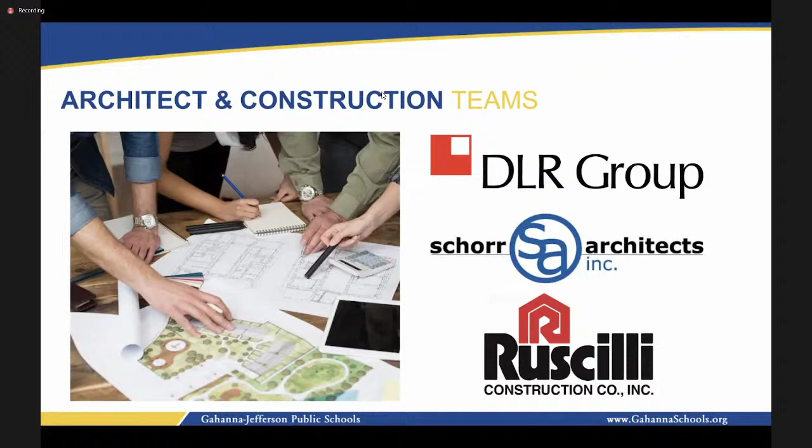I'm not going to name all of the people on our Master Facilities Committee, but this group has been outstanding, knowledgeable about construction and about schools. They represent so many different facets of what goes into a building project like this. I am so grateful for their leadership, their guidance, and their help in designing both Phase 1 and Phase 2 of our Master Facilities Plan.

I would be remiss if I didn't express our gratitude to our community for giving us permission to go ahead with this project. We have 5 construction projects besides building a new Gahanna-Lincoln High School. We're doing additions at Blacklick and High Point Elementary, and additions to all 3 of our middle schools, East, South, and West. We're doing this work because we're growing. There's lots of undeveloped land that's getting quickly developed in Jefferson Township, and we need to build in time for all the new families coming to our district.

We're growing every year, and much of this work, our Phase 1 and Phase 2, has been driven by an enrollment study, a demographic study we did on student growth, led by a firm out of Hilliard called Cooperative Strategies. They studied our enrollment, all our housing tracts, our apartments, and our developable land, and gave us a forecast of where we would be with our student population.

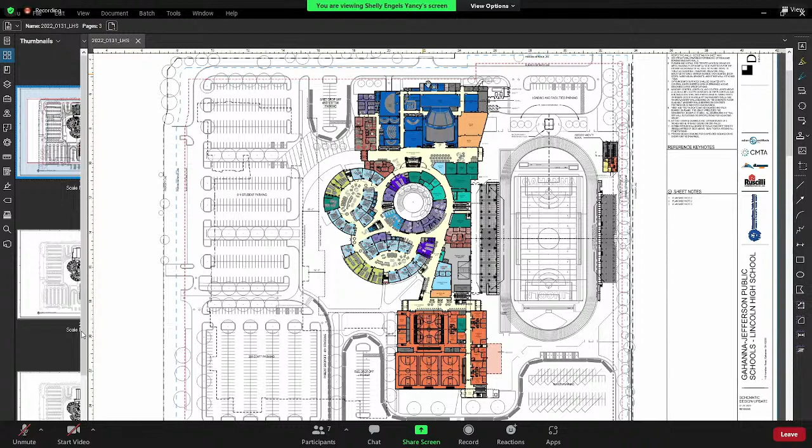Is the gym. So I'm going to zoom into the north. Here we have the main admin suite with a secure entry vestibule where you have to be buzzed in to enter the school.

This is the north side, so we have a north commons, which also helps with the lobby space for the performing arts. The admin has the principal and key people in this suite, as well as a workroom and lounge.

We have the Hamilton House, the special needs program here, and the Performing Arts Auditorium and Stage, which seats 1,200 people. We have the orchestra, band, choir, and black box with some of their ensemble and practice rooms, as well as some support spaces in the back for the stage.

The music tech classroom is also in the performing arts area, as well as scene shop and costume. You'll also notice a lot of gray boxes, and that is what helps support the building functions and keep the energy costs down.

You'll also start seeing the distributed dining that we have throughout the high school in these orange colors, and this is the main kitchen and servery.

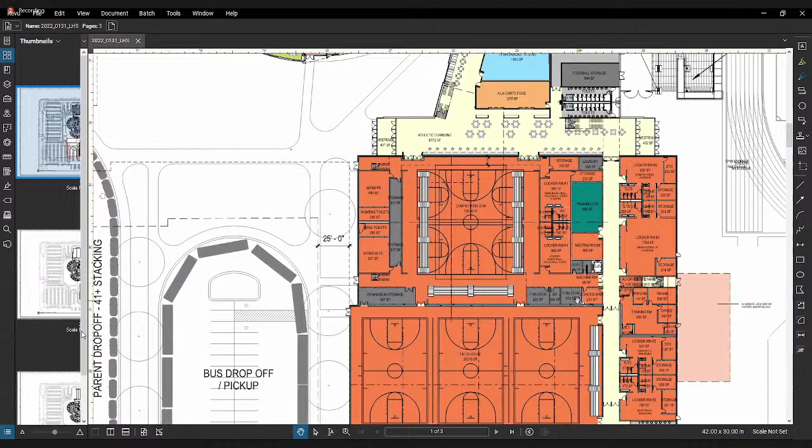And then we have the main competition gym that will seat 2,500. That has locker room support on both sides, as well as storage, and a direct connection to the field house. We also have a few CTE programs, as well as more support locker rooms and meeting rooms.

As I move up to the second floor, you can see these open to below because we'll have the double height spaces for the gyms. And then there's wrestling and weight room and coaches suites with some special ed future fit programs.

As I move back to the north, you'll see this is the Commons connection to the below for the South Commons. And then this center portion here, where the Prides and the CTE and the visual arts are, that's a 3-story building. And here you'll see again the similar Prides.

And then we have again the special needs, the media, and some classrooms for future growth. Up here is the arts area for the 2D and computer arts. And then you'll also see the stacking of the admin and counseling.

So I go up to the third floor. Again you start to see that here are the 2 Prides, the connections with CTE, the counseling, the admin, special needs, and some more CTE classrooms down here.

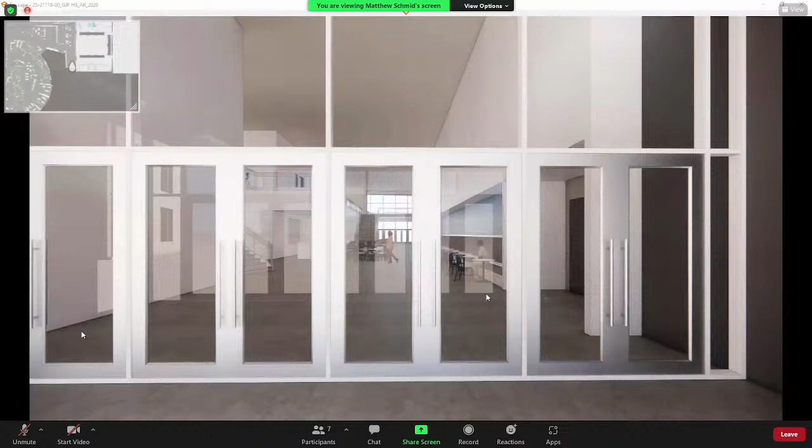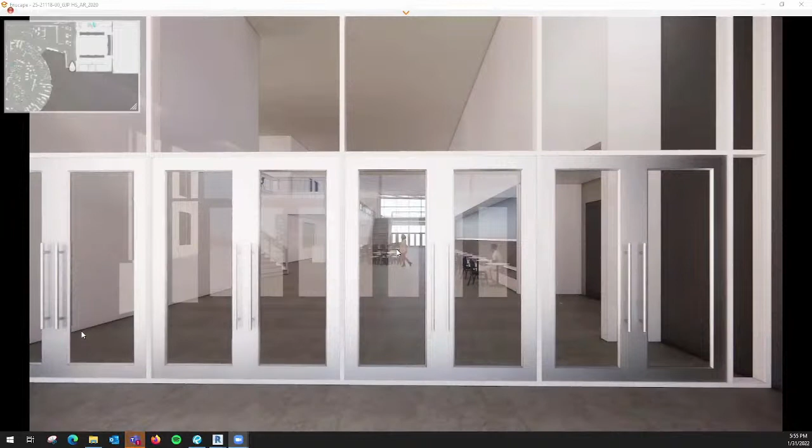Before I get started, I want to orient everyone to where we are within our 3D model. You'll see in the upper left corner a mini map of what Shelley just showed from our walkthrough of the plan. The intent of this 3D walkthrough is more to show the spatial qualities of the areas. There are a lot of white walls, and a lot of pieces of furniture and materials that have not been selected yet, so just wanted to give that as a caveat before we started.

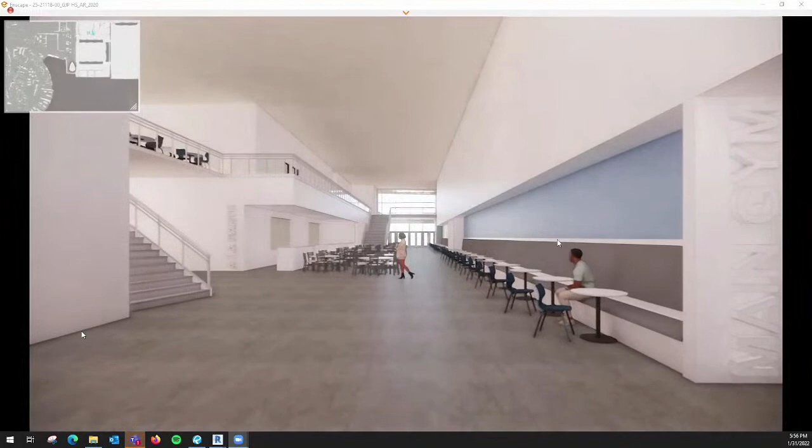We are entering into the west entrance to the athletic areas as part of the walkthrough. As we go through the doors, you'll see the main gym doors, as well as additional seating for the South Commons servery area, where Shelley noted an a la carte space. Right in front of you is a connection to the second floor.

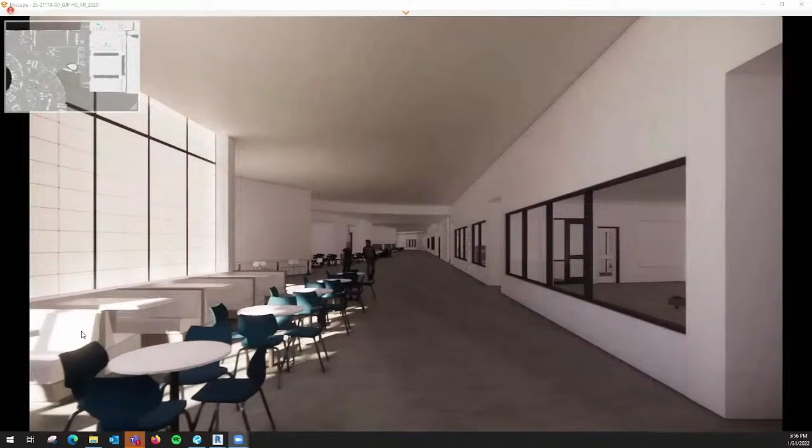Right now we are going up the main north-south passage of the school. On the right side you'll see classrooms, a TV broadcasting area with students recording podcasts, as well as additional classroom space. As Jill noted, the hallways within the building are about twice as large within the main circulation areas as the existing building, which is what you're seeing currently.

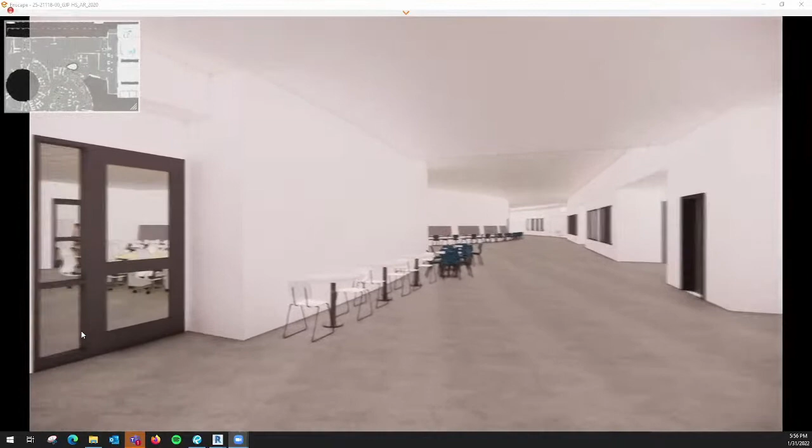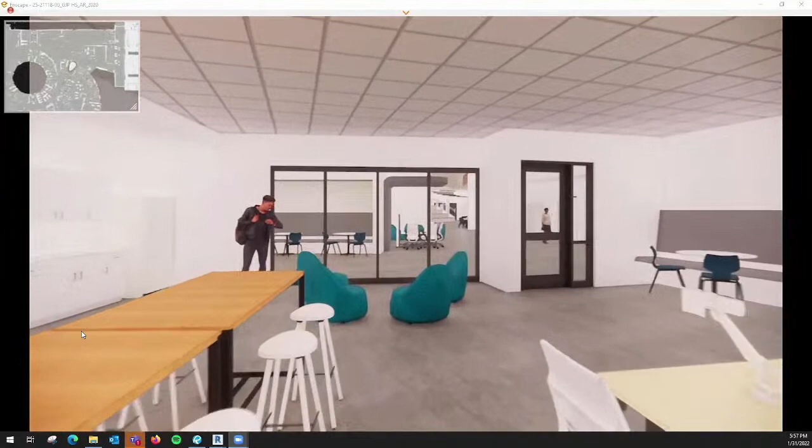We're going to take a left here into a teacher lab, which are located at the entrances to each of the academic prides located on each floor. On the left side of the teacher lab you'll see some smaller rooms for individual touchdown and phone calls, as well as some benching stations throughout the teaching labs. These function similar to the way your current departments are distributed throughout your building for collaboration purposes.

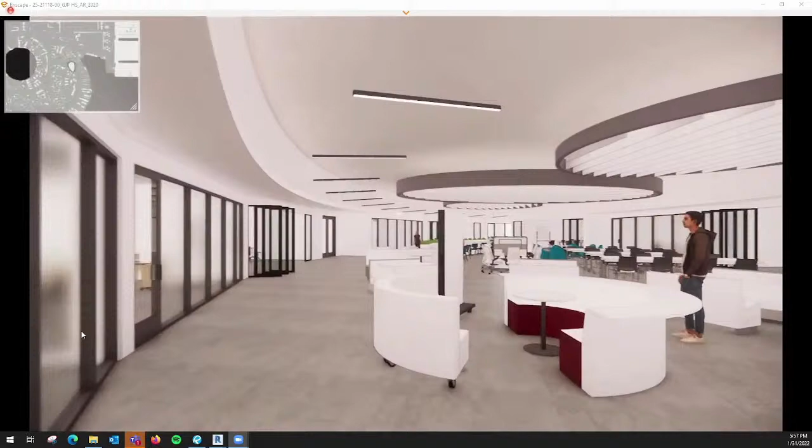We're taking a left here into our first pride. On the left side you'll start to see some classroom spaces with flexible openings as well as fixed openings—those are the light blue spaces Shelley showed on the floor plan. In the middle you'll see the extended learning areas that were highlighted, which have all the classrooms open to its academic center.

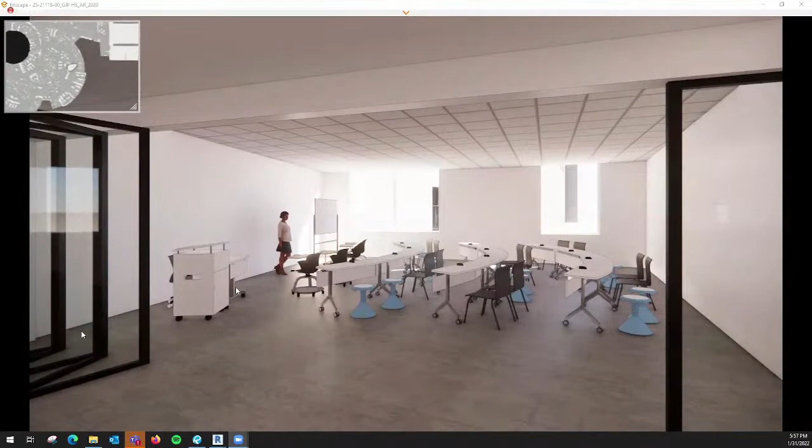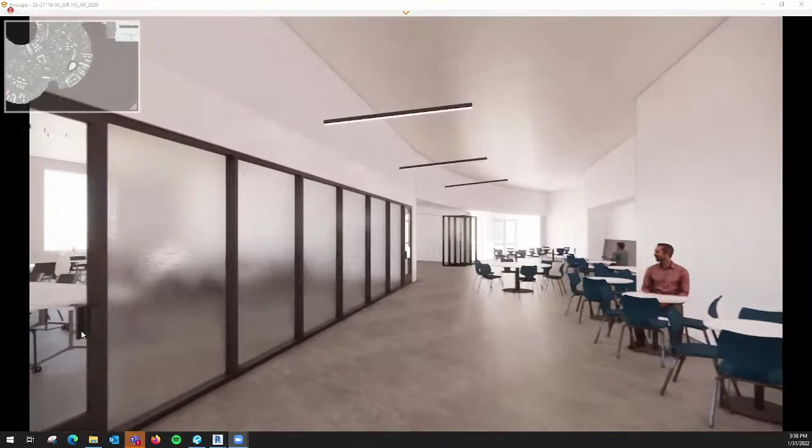Here on the left is an example of one of those typical classrooms—flexible furniture, with opportunities for exterior glazing to allow light to come not only into the classroom but to the center space as well. As we're walking through, you can start to see how some of the classrooms have film on the glass. This allows for a diffusion of light to carry through, but also allows for privacy and opportunities for teachers to have more focused classrooms.

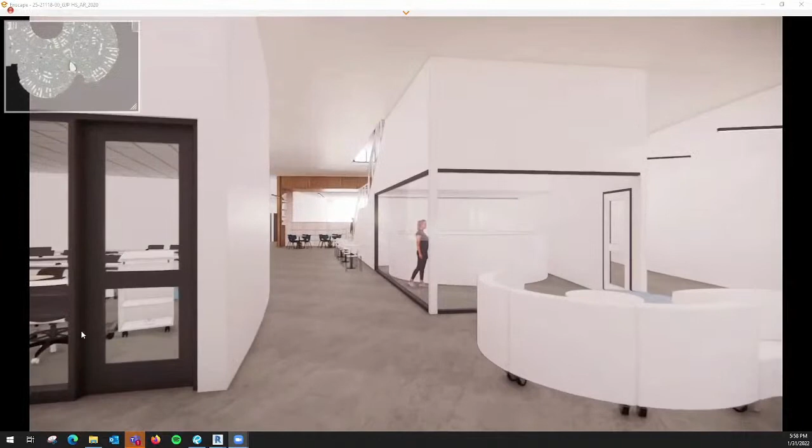As we continue through the path here, we start to go into the intermediate collaboration area between the two academic prides. You'll see a classroom on the left with extended learning opportunities, as well as areas for small group and large group gatherings distributed throughout each floor. On the right, as an example, we're proposing where the robotics pool could be as part of that extended learning opportunity. In front of us you'll see one of the areas of the media center.

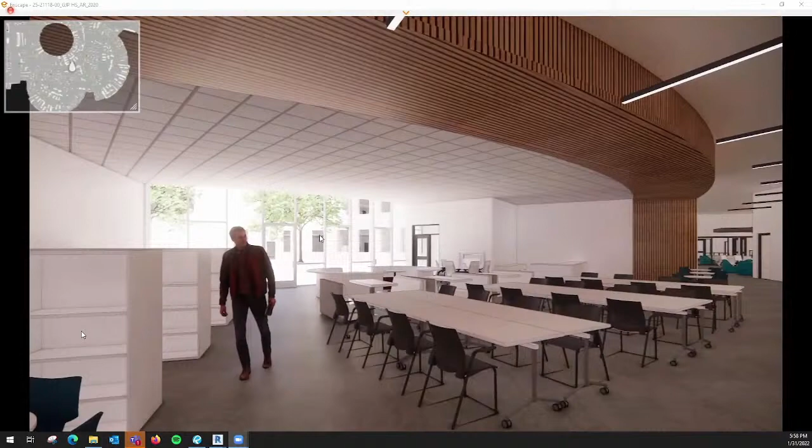This is on the first floor. Not only does it extend into the intermediate extended learning area, but it also has a direct connection to the exterior courtyard to provide natural light and additional learning opportunities outside. Outside of the media center, you'll see a vertical connection between the floors that allows the prides to have a vertical connection throughout the building.

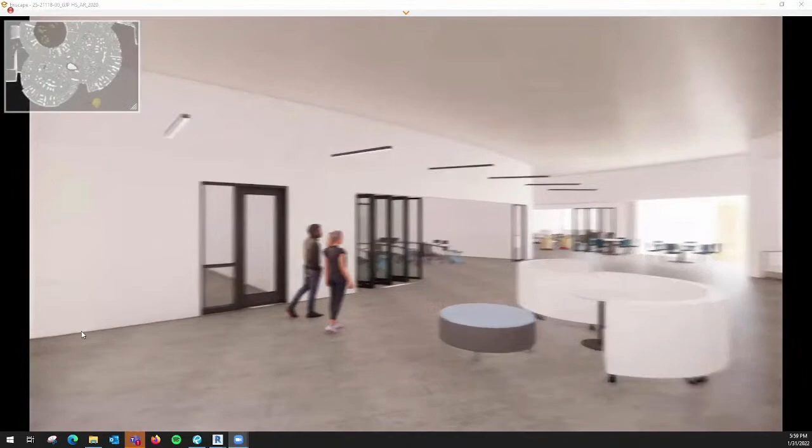We're going to go up those stairs onto the second floor, where you can start to see how that vertical connection plays between the three floor areas. At the end here, you'll start to see some small group areas for individuals to touch down and break out, as well as a connection to the third floor.

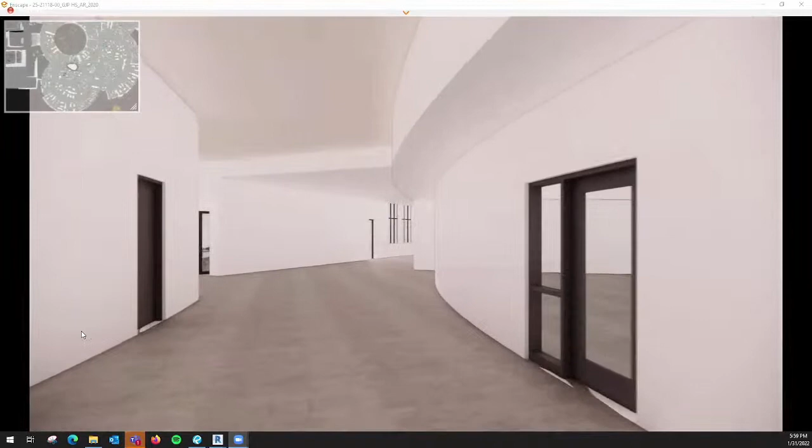On the back side of the classrooms, as we continue forward, you'll start to see small groups and large groups on the left side of your plan, as well as additional classroom space for special education. As I noted before, the teacher labs are located in two locations on each floor, both at each entrance to the academic prides. So as we're passing here towards the North Commons, you'll see a peek into another one of those teacher lab spaces.

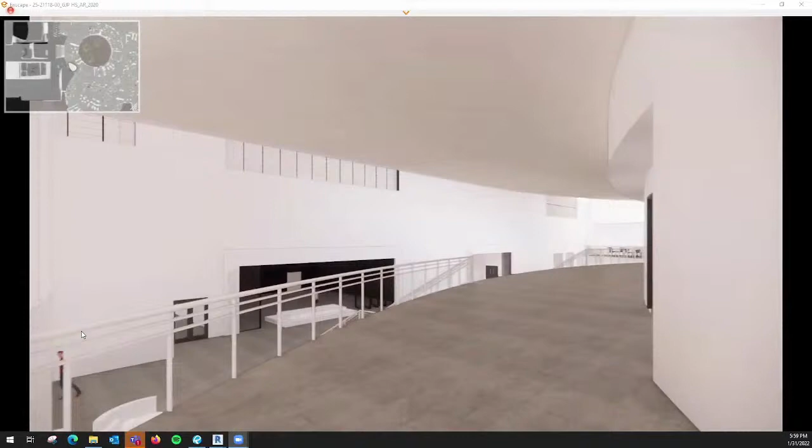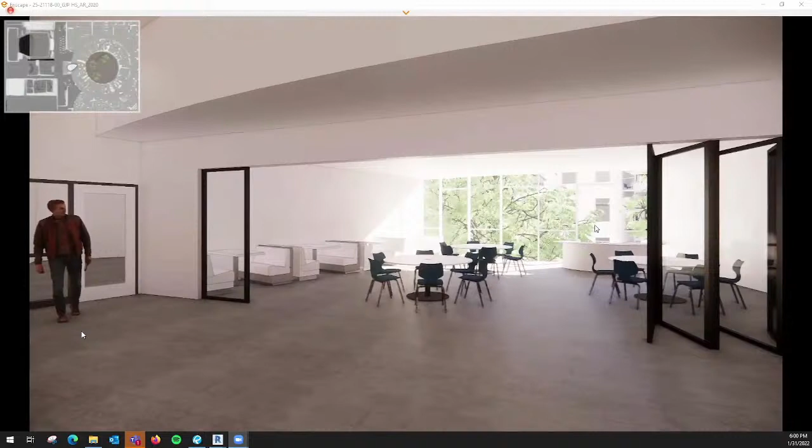As we go through the doors, we are now in the North Commons, near the front entrance to the building, the entrance to the black box area, as well as the auditorium and the main seating for our servery area. At the top of the stairs, you can start to see some additional separated, more quiet areas for dining, as well as opportunities for flexible classroom space that connect directly to the courtyard.

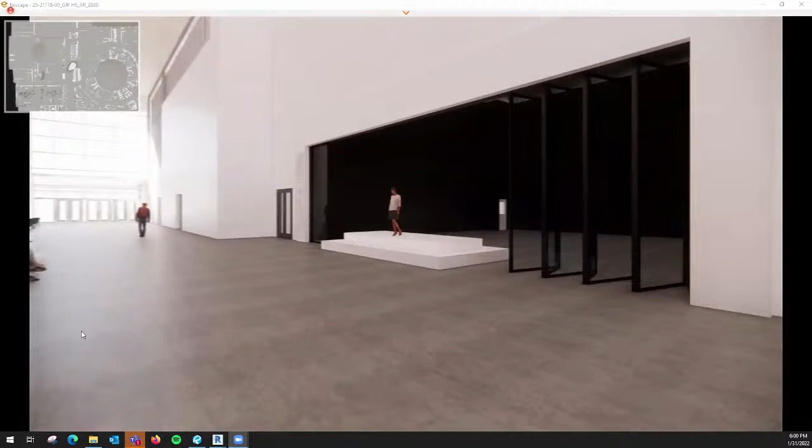We are currently proposing a connection between the black box and the main commons as an opportunity for additional learning, presentations, and performance. Backing up here, looking towards the main entrance, you can start to see different ways that we're introducing natural light into the building.

Glazing at the front entrance provides direct natural light into the space, while we're also performing some diffused areas as well to provide natural light in other ways.

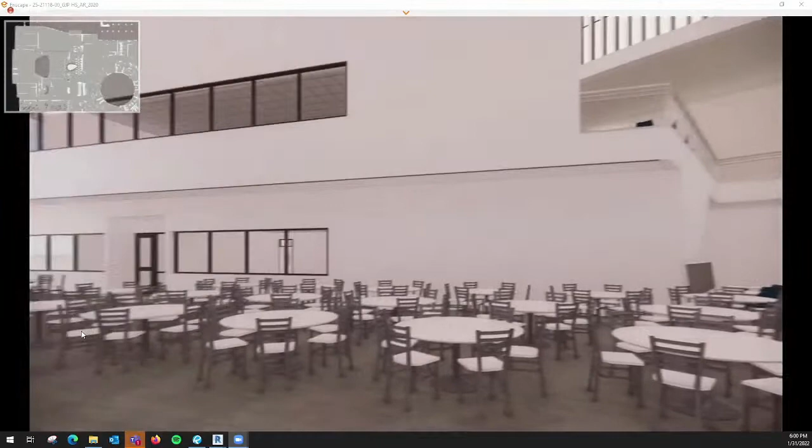On the other side, in the servery area, you can start to see some of the CTE classrooms on the lower level, as well as the art classrooms on the top level.

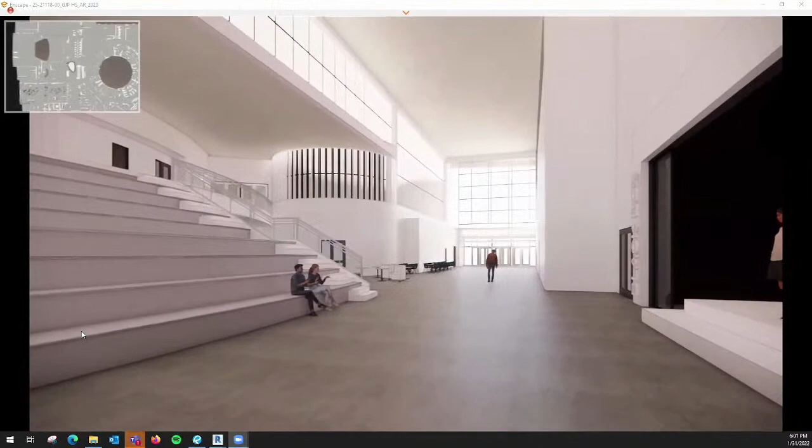Moving back towards the front entrance, you can see students having the opportunity to watch performances taking place. Not only does the learning stairs provide areas to watch these shows, but also areas for additional dining as well.

We'll be taking the left here, circulating back towards our academic prides. Teacher labs are shown on the left, and similarly on the right, you'll see the infirmary area that Shelley had highlighted on the plan.

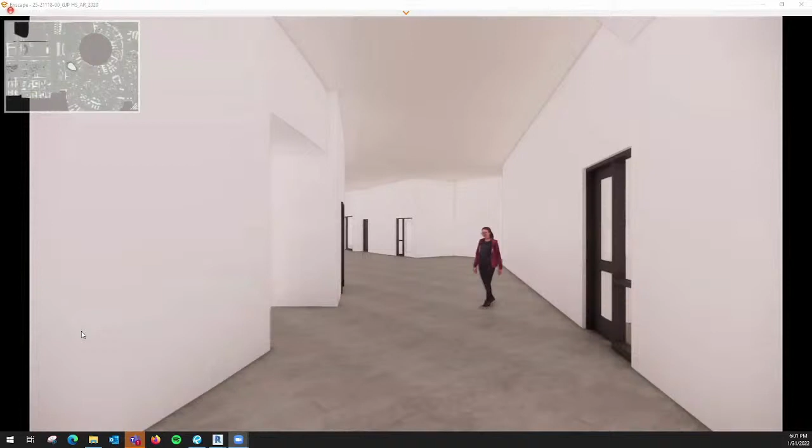As you walk through the doors, we'll be entering towards the west pod. Similar to the ones we've already shown, there are some flexible seating areas for additional collaboration, direct connections between classrooms to our central learning space, where we will be ending the walkthrough.

Thanks, Matt. And just so everyone's aware, we are going to continue developing the design where we'll get into those materials, the finishes, and acoustics as we move forward.

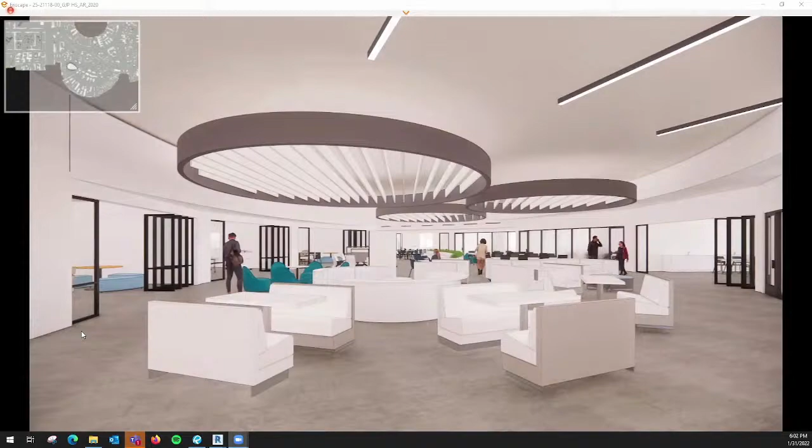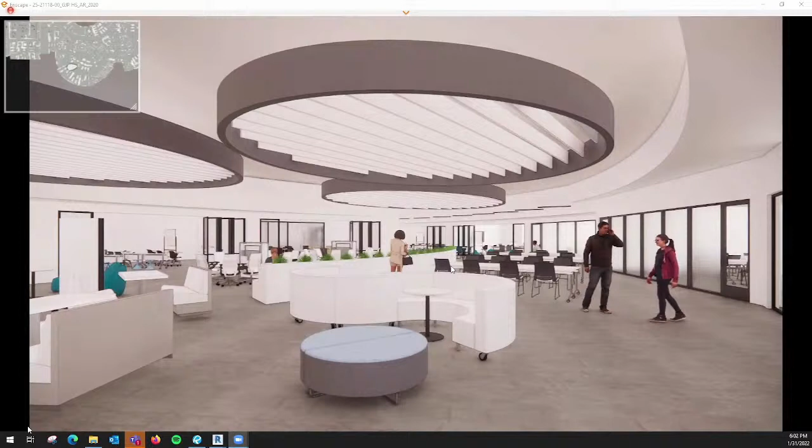Thank you, Matt and Shelley. It was brought to our attention that viewers online were not... Jill, if you're talking, we cannot hear you again. It was brought to our attention that viewers at home were not able to hear much of the presentation of the floor plan, and we know we missed the very beginning. So we're going to ask Shelley to go through it again, but I promise the second time you see it, more starts to set in. So Shelley, I'm going to pass it back to you.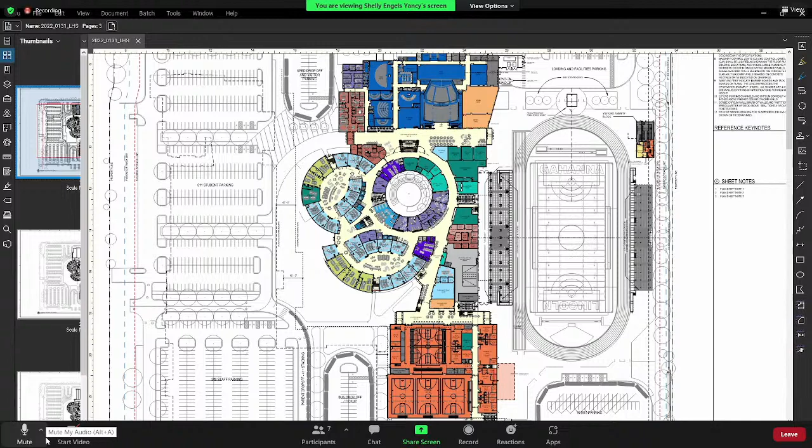Okay, can you hear me this time? I can hear you on my end, okay Shelley. Okay, I'm hoping you guys can hear before I go. Okay. Okay, I'll go ahead and start.

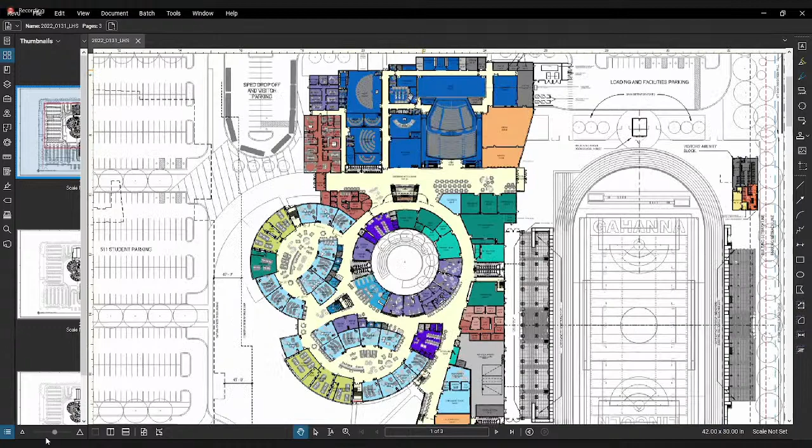So I do want to set the stage that this is one of the options of the site plans, but we are going to look at this floor plan because this is the focus that we're doing for whichever site option we choose. Okay, so let's get started.

So the building is divided into three main parts. We have the administration and the performing arts, the core curriculum and the CTE arts in the center, and then the gym building in the south.

I'm going to start in the north, and here what we have is the main entrance and the administration. We have a secure vestibule, and as you come in, you'll be allowed into reception and then into the building once you've passed secure checkpoints. This is the main administration office with the principal, workroom, lounge, and some other support administration staff.

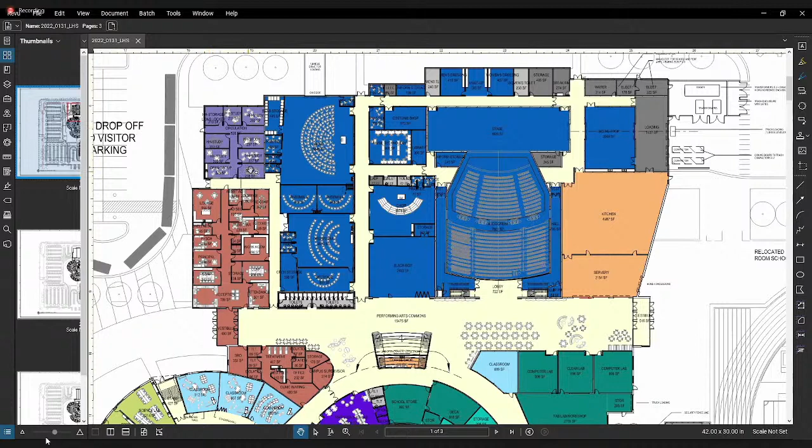To the north of that is the Hamilton House Special Ed program. Then we have the performing arts in dark blue. This has the auditorium with 1,200 seats, and then the choir, band, orchestra, and black box. They all have support practice rooms and ensemble spaces, as well as dressing rooms along the backside of the stage.

We also have some of these gray boxes around the building, and those are what help support the building to function, so you'll see some of those throughout the space. We also have the main kitchen and serving area for student food. And then this is the North Commons, where we have...

Oh, shoot. Can you guys still hear me? Oh, I can still hear you clearly, Shelley. Okay. I'm hoping it's okay.

Okay, so we have the North Commons here. Okay Jill, thank you. You're texting.

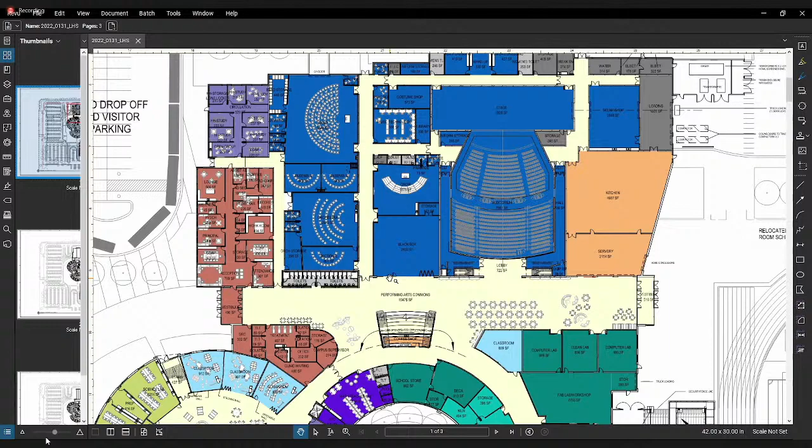The North Commons has some of the dining throughout here, where we also have a learning stair that has a connection looking over to the informal performance area we're proposing with the black box.

We also have the clinic to the south of the entrance. And then what you'll notice, we did see also in the walkthrough, was the courtyard. So this white space right here is actually greenery and a courtyard that students and teachers can access.

So I'm going to walk through the prides here. We have 6 prides in total, and those are just a collection of 10 classrooms and 3 science class labs. This yellow space here is an extended learning space where classrooms can open up and kids can spill out into this area.

It can also be used for small group learning and teaching. You're also going to notice within each pride that there are small group spaces, as well as sped intervention spaces and departmentalized teacher labs at the entry.

We also have bathrooms at each pride. So that was the North Pride, and the South Pride is this space over here, which also has the 10 classrooms, the 3 science labs, sped intervention, and a teacher lab and restrooms.

We also have stair connectors to get up to other levels quickly, also for exiting. And then we have special needs classes integrated into our prides. This center space right here has a large group area as well as media, which is like the library.

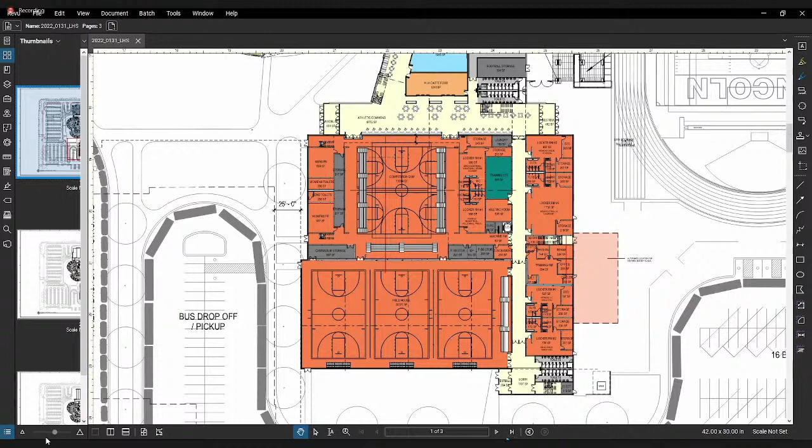I'm going to move to the second floor now. The second floor of the gyms, this is a double height space, so these gyms show open to below. You start seeing all the bleachers and the seating along here. We have the wrestling rooms, coach's suite, and weight room.

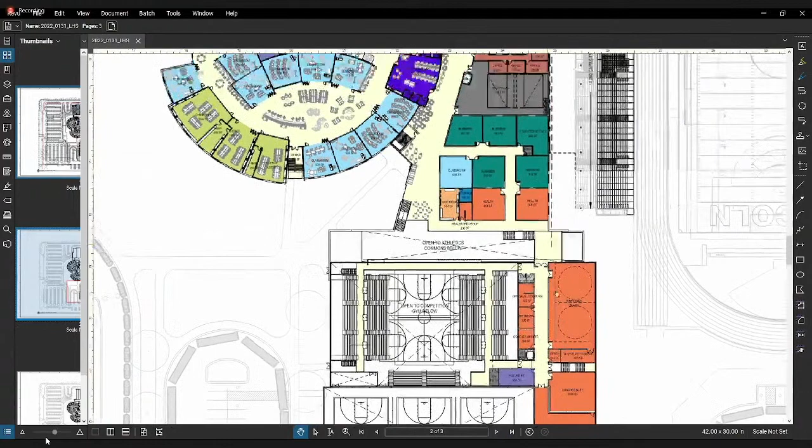And as I move north, this part of the building will be 3 stories high. This really is the same footprint as we go up, so we can be really economical. This is the North Pride and the South Pride, and those stack.

You can start seeing some small group rooms here, the second floor media, and then we also have additional classrooms for growth. On the east side, we have the arts, the 2D art and the computer arts, as well as some business and health classrooms.

As I go up to the 3rd floor, again, same footprint for the prides. You also see that connection that we showed in the walkthrough where you can see up with skylights above to let that light into the center of the building.

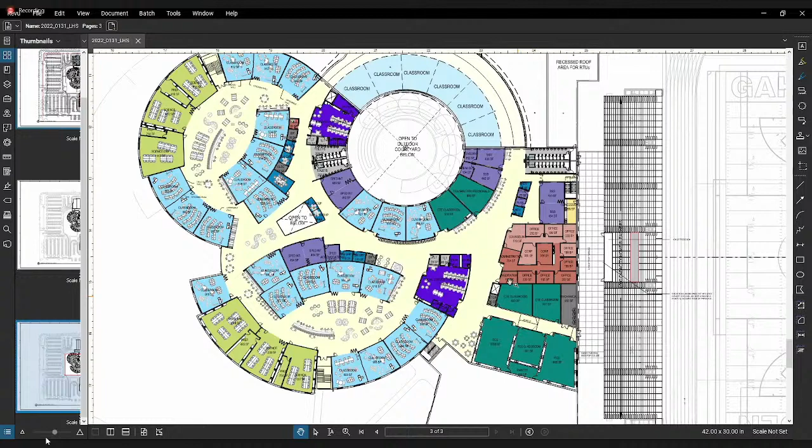And then these rooms over here for the South Pride. On the east side, you start to see culinary arts and CTE programs, as well as a few more special needs programs. We're also looking at proposing an additional 6 classrooms to complete the ring for the 3rd floor.

And I hope everyone got that one this time.

I think I'll stop sharing.

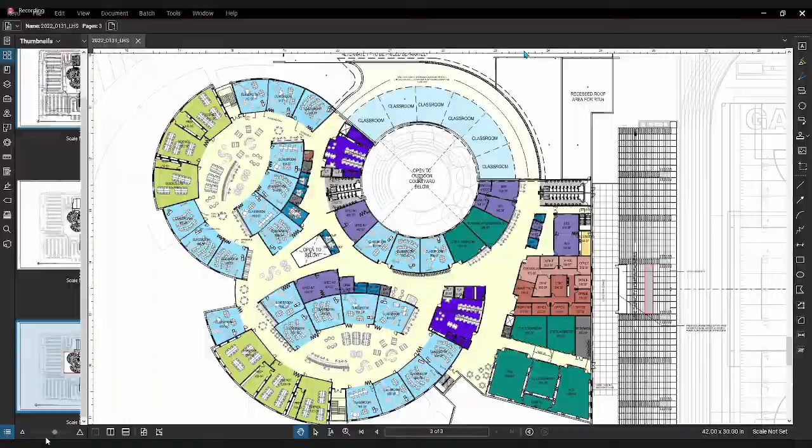Back to you, Jill. Thanks, Shelley.

Sorry for our technical difficulties. I think people online could actually hear, but you didn't hear the beginning here. So we hope you got more the second time through.

The construction process in the pandemic, and even before, with all the growth happening in Central Ohio and all the building taking place, and then the supply chain issues has caused us a lot of challenges. And so we have Mark Ogden from Turner Construction here to talk about that tonight.

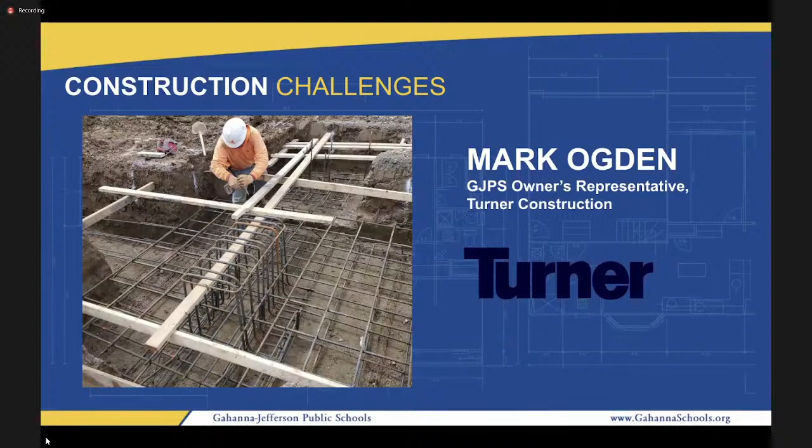As the slide suggests, every construction project has its challenges. Bad weather, costs, site constraints, and logistics all need to be managed on every project. Now, however, construction projects have several unique challenges that are very different than even one year ago.

We've all heard about Intel coming to town. This is indeed a groundbreaking investment for Central Ohio. The truth is, though, over the last few years, Columbus has been seeing billion-dollar investments from Amazon, Google, Facebook, and there is no end in the foreseeable future to that continued investment. The airport, Children's Hospital, Columbus City Schools all have mega projects on the horizon. OSU has released over $3 billion worth of construction into the market that will carry through the next 5 years. And this is all in addition to the normal market activity that we would typically see in Central Ohio.

What this has done is put enormous pressure on available labor. In other words, the bench isn't nearly as deep as it once was. And the impact is not just on availability, but also, and more importantly in my opinion, on productivity.

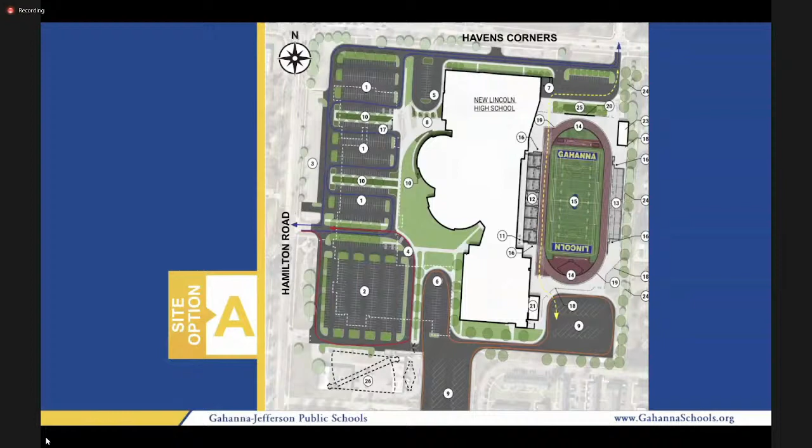If we want to move to option B, this is a scheme where we tackled a lot of those same problems and challenges, but in a little different manner. What we proposed here was to leave basically the footprint of the existing field in the same place, and then move the building and design it to the east of that, in between the existing field location and the eastern portion of the site. This one too meets that $158 million budget mark we were shooting for, and the duration to construct the building is 35 months with this one as well.

The site redevelopment is roughly 12 months, but the key here is that those 12 months are not consecutive. So really the duration of the sports and stadium impact spans about 2 years, with different sports intermittently affected throughout construction. That impact is basically from 2022 to 2024 for the field.

You can see we have student parking up in the northwest corner, staff parking in different locations including the lower right-hand portion as well as just below the field. We have bus parking coming in from the south, but more in a loop rather than before. The other change here is that the special ed drop-off is in the northeast corner of the site.

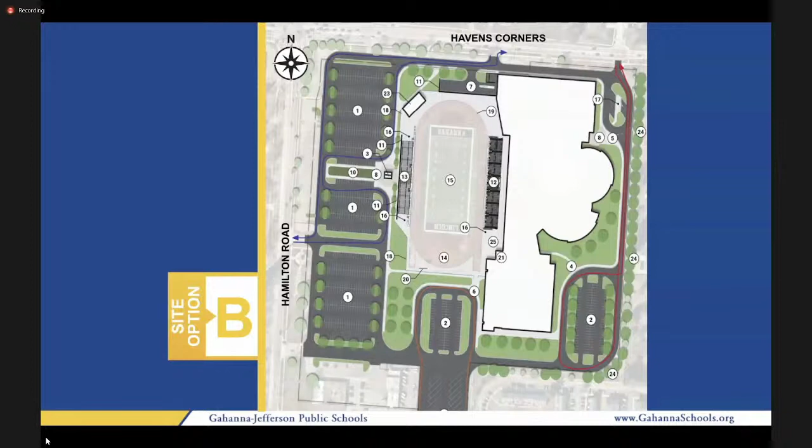As far as pedestrian flow, the majority of pedestrians would be coming from the west side of the building around the stadium, then accessing the entry to the north for the main entrance, and more southern around the stadium for athletics. The last point is the primary focal point. If you're looking from Hamilton or Havens Corners or the intersection of both, you can see the stadium and the northern portion of the building on Havens Corner Road, as well as the southern portion if you move south down Hamilton Road.

The last option we'll look at is option C. This option really took into consideration: what if we could just build the stadium later and put it someplace totally different, not in a vacant spot. I'll start with costs in this one.

Because of the phasing, we're going to have to keep the existing building in operation until the new building is built. So we'll be building the new building on the footprint of the existing football field. That's going to impact athletics a little bit more than the other two sites, as well as the overall duration of construction of the whole project.

Because of that extended duration of the project, the budget for this one is $161.5 million, accounting for both escalation and extended construction times. The building, just like the others, would take 35 months, but the site redevelopment would take roughly about 18 months.

Because of the phasing changes and differences between this one and the other two, that really impacts quite a few more school years. Athletics and the stadium would really be out of commission on this site for roughly 4 years, so you're looking from 2022 to 2026.

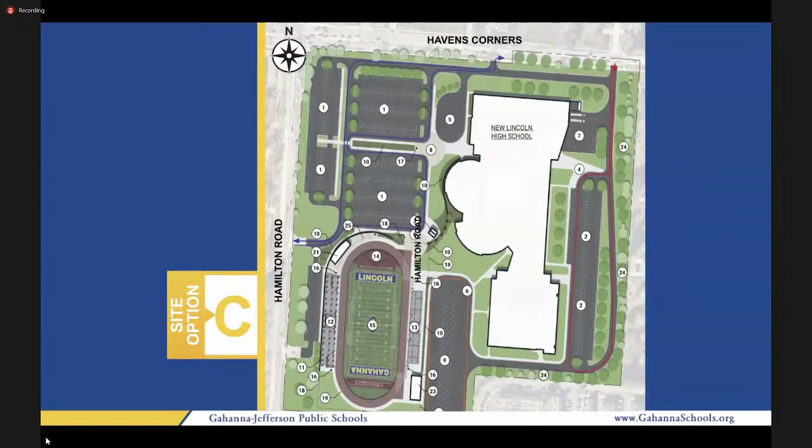If you'd like to go to the next slide. What we're going to show on this slide is really all three schemes next to each other. I know this looks really small, and we're not expecting you to get out your magnifying glasses. You will have the opportunity to view these online, as well as handouts, after the presentation. But I kind of wanted to generally show you the big moves.

So option A takes the field and moves it to the east, and puts the new building in between the existing footprint of the existing high school and that relocated stadium.

Option B leaves the footprint of the stadium in place. We will have to do some work on that existing spot, but then locates the new building all the way to the east on the other side of the stadium. Option C is to relocate the stadium to the southwest and then put the building in the northeastern portion of the site.

And Paul, if I could just jump in and clarify a couple things. Regarding the stadium being out of commission, we want to make clear that doesn't mean sports won't happen. Sports seasons will still occur. Students will still have the opportunity to participate in athletics, band, and things like that. We would just need to get creative and make partnerships with other locations close to our district to support us for home competition times, as well as be creative with where practices would happen while the stadium is out of commission.

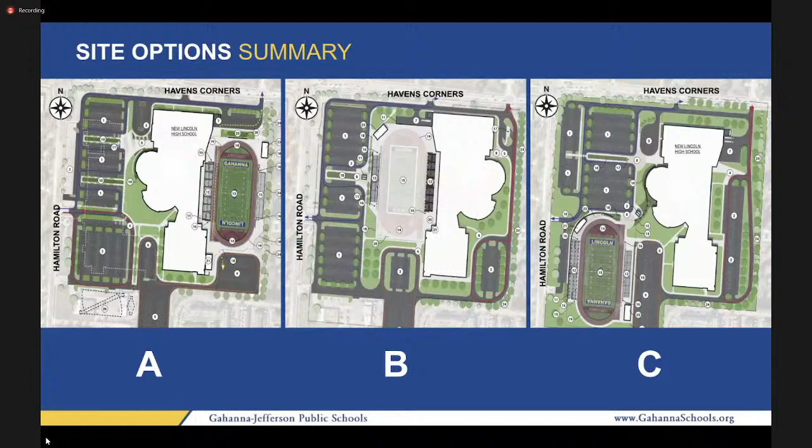So I'll just touch on, there's a handout up on the screen. We don't expect you to be able to read it, but this has a lot of the information that Paul just shared regarding the site plan options. As you leave this evening, we have handouts printed out so you can take this home with you and refer to the information as you're processing it and preparing to provide feedback in the thought exchange. We will also have it shared throughout the community and on our website for individuals who aren't here tonight to get a hard copy, so they can download it at home.

We're almost ready to get into our Q&A period, but I just wanted you to take a look at this corner. This is the way it looks today, and for years we've looked at this view with lots of pride that our high school has always been the rallying place for our community. We're a one high school town, and we have amazing academic, athletic, and performing arts programs that have served our students well for decades. And this building has served us well.

But this corner is going to transform in some form or another, no matter what site plan we choose. And we want you to think about this as a legacy project. This is a project that is going to serve our community and our students in the same way that this building did, for the next 100 or so years. And we wanted to make sure that we were building a high school that was able to foster that.